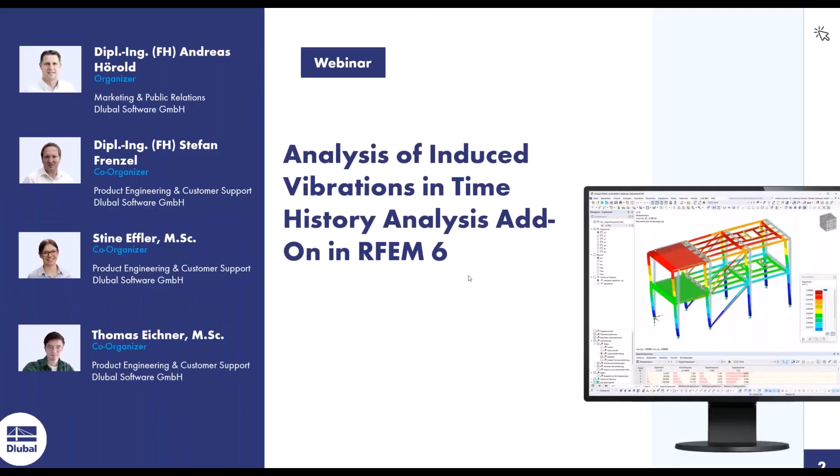So hopefully you can see my screen. Okay, we go directly to content. As we said in the introduction, we want to have a look today at the new time history analysis add-on. I want to show you the features of the new add-on time history analysis in RFEM 6. So today I want to give you an overview of the dynamic analysis add-ons which we have now in RFEM 6 or in RSTAB 9.

Then in the next step, we want to do a natural frequency analysis of a structure using the modal analysis add-on. This is part of the dynamic add-ons we have in the program. We want to do it for a building like this which you see on the screen. It's made out of concrete and steel.

The next step of our example is that we want to perform a time history analysis with a machine-induced vibration, and therefore we use the time history analysis add-on to separate the loads, horizontal and vertical loads, and to give them a timestamp to get a result. When we are done with this, I want to show you how to optimize the structure in the case of resonance of the structure.

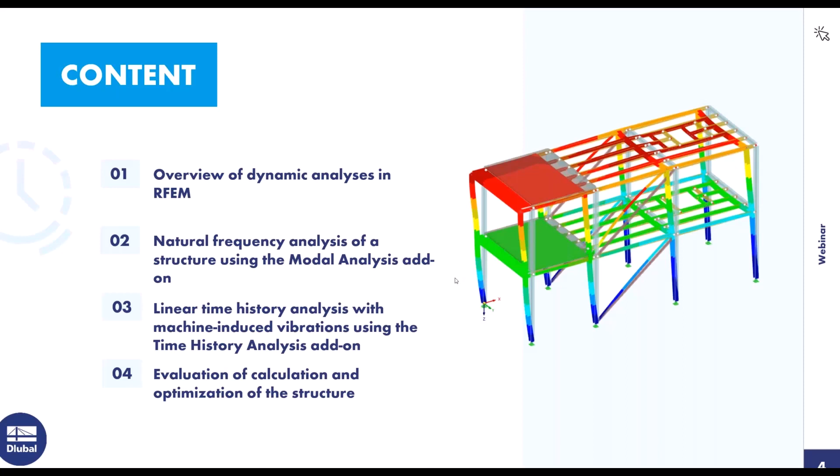Okay, then I'll go to the next one, and here you see the add-on modules we have in RFEM 6 and RSTAB 9. The first one here on the left side is the modal analysis. This is a basic tool in RFEM 6 to calculate the eigenvalues of the structure. You get the equivalent load factor, you get the eigenfrequencies of the structure, which is a really important tool to use the other dynamic analysis tools. You need the modal analysis.

The next one we released was the response spectrum analysis add-on. With this add-on, it is possible to do a response spectrum analysis, in case of earthquakes, for example. It's a linear calculation in this case.

Here you can, of course, choose a response spectrum according to a design code, for example, the Eurocode or the US code or some other codes, what you want to use. You can also create your own response spectra, maybe also out of accelerograms if you want to do this, and then the program will calculate for each FE mesh point internally an equivalent earthquake load, and then you will get at the end, of course, the internal forces for the directions and also the combined reactions of the whole structure.

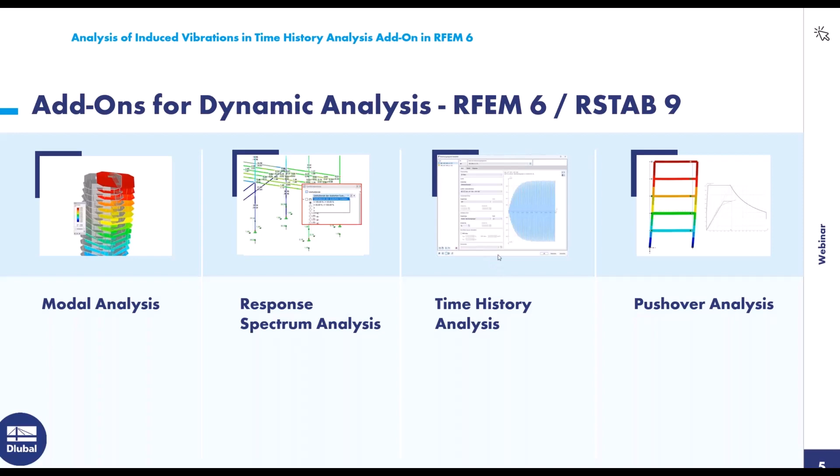And last but not least, the add-on module is the time history analysis add-on. In this add-on, you are able now to combine time with loads and to get a result then out of that. And this one we want to do today, and therefore I created a small example. This is here our practical example.

It's a machine-induced vibration. So just as an introduction here, that's a normal steel frame structure with the concrete surfaces here on this side. And we have here a machine which induces a vibration on the structure with a rotating unbalance of 0.2 kilonewtons and a frequency of 5.6 hertz. And then we want to see what happens to the structure when we bring this load with the frequency on the structure.

Therefore, I want to switch to RFEM 6 now. And here in RFEM 6, of course, I opened the structure already. My colleague Andreas will send you, I think, a link with the structure after the webinar, where you can have a look at what we do here today.

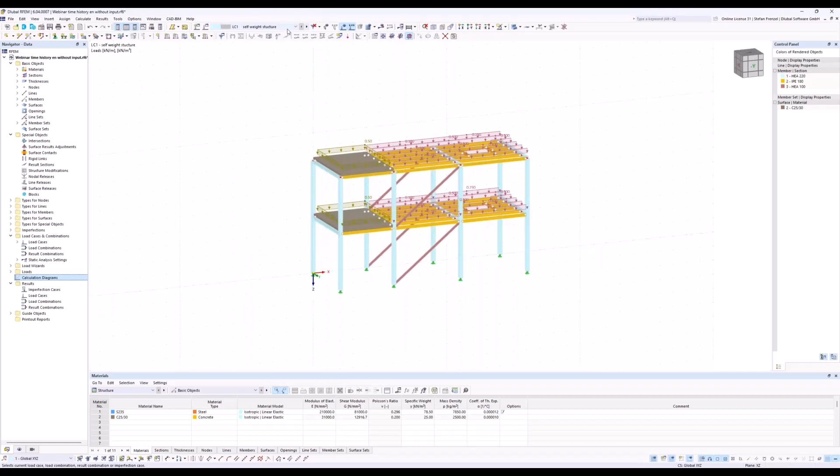Here in RFEM 6, you see at first our structure and also some loads here, the self-weight of the structure. And I created also a self-weight of the machine in this case. And I created here a horizontal induced load and a vertical induced load. That's this one and this one. I will show you later how to calculate this. But in the first step, we want to do a modal analysis for this structure.

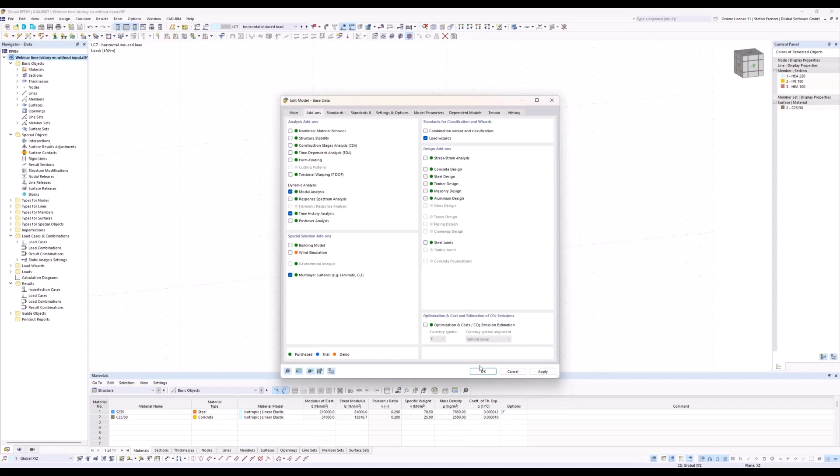And therefore, you are able here in the program to go in the base settings of your file, and in the base data, you are able to activate add-ons. In our case, we want to activate the add-on for the dynamic analysis. Here, in this case, modal analysis and the time history analysis, because we want to use them afterwards also. You see that in RFEM 6, you are able to activate different add-on modules for analysis, dynamic analysis, or for design of structures, for example, for steel or concrete. And here you're able to switch it off and on in the add-ons tab in the base data of the program. So in our case, we want to do this, and we say okay.

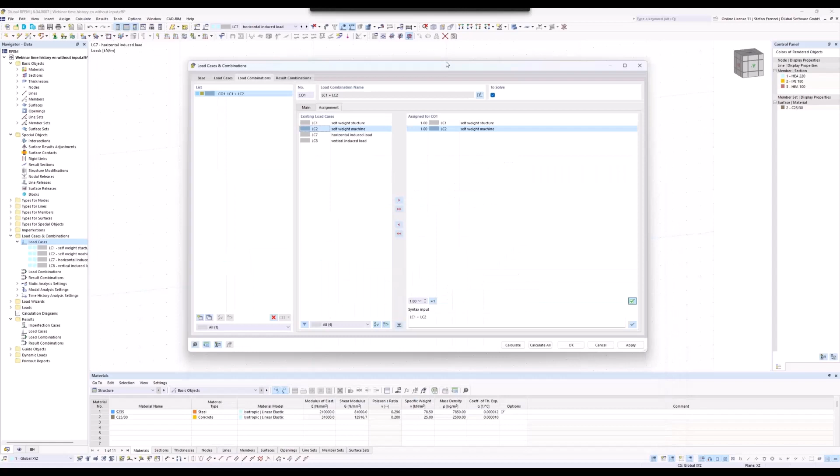And now we want to do a modal analysis for our structure. How can we do this easily? That's the first question. Therefore, I go here in the load cases and go at first on edit. You see that we have here 4 different load cases. For my modal analysis, normally I need 1 load case. That makes it a little bit different because here I have to create at first a load combination to assign these 2 load cases. Here I want to assign load case 1 and load case 2 because in this case I want just to have a look at the eigenvalues of the structure when the self-weight of the structure and the self-weight of the machine is available, and therefore I took these 2 load cases for that.

It's not necessary to choose another static analysis setting here, because for the modal analysis we just use the masses which are in the vertical direction, or Z direction. So therefore we can go back to the load cases, and here we create a new load case. It's load case number 9 now.

If you want to perform a modal analysis in the program, you just have to switch the analysis type to modal analysis. If you switch this to modal analysis, you will have a new option, which are the modal analysis settings. And of course, the program wants to know which self-weight or which load should be used for the modal analysis. So if you have a load case with loads in it, then the program will automatically convert the loads into masses. But it's also possible to create masses in the load cases, and then you can use these masses.

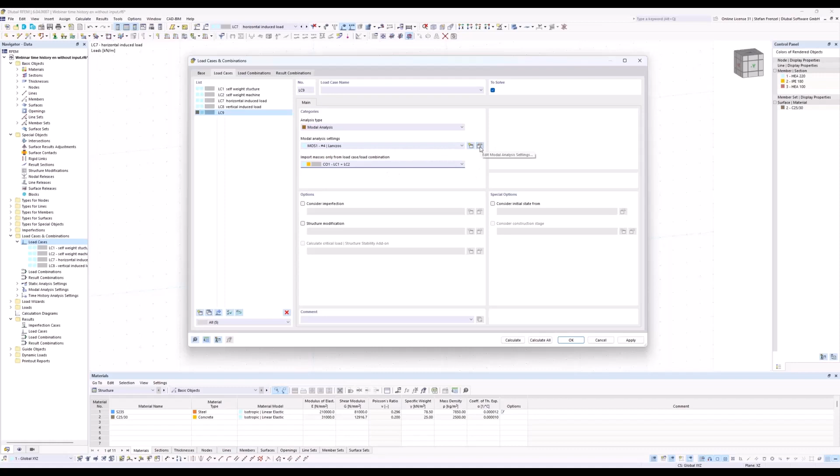In our case, we want to use load combination number 1, which is made out of load case 1 and load case 2 together. And these masses we want to use now for the modal analysis. Here I just have to go into the modal analysis settings, because for this modal analysis I need a number of modes. It's not 4, it's 30. So I need 30 eigenmodes for the calculation. I know this because I did it before, of course.

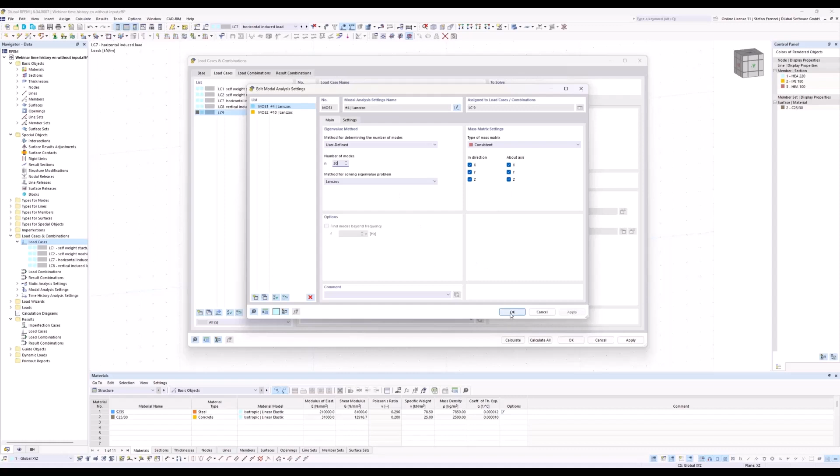Otherwise, you have to choose your own value, or you have to prove it, of course. So the mass matrix should be consistent. That means the masses are distributed on the members via a function. That's normally the best way, because it's the best way to consider the masses exactly on the structure. Then we can click OK, and we can do a calculation.

Now you see the program will mesh the structure first, and then the program will calculate load case number 9. So it's not necessary to calculate load cases 1, 2, or the load combination, because we just took the masses from these load cases or load combinations. Our first natural frequency you can find in the result navigator. Here, of course, you can switch to the eigenvalues.

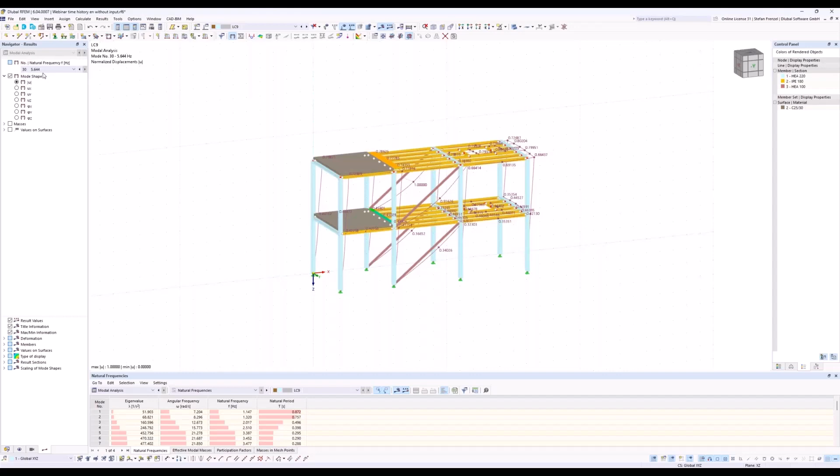But here's a really good eigenvalue. It's also 5.6 hertz. It's like our induced vibration, and you can see the structure will move in the x direction globally. That's normally not so good when you get this. Because in this case, I will switch back to the presentation.

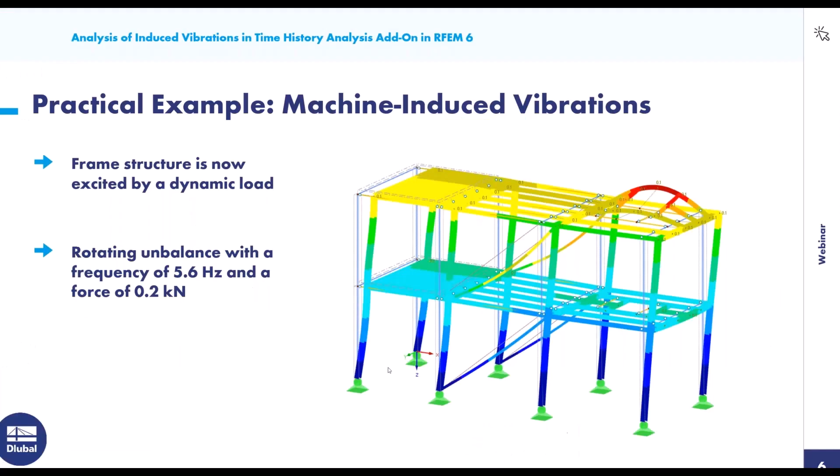In this case, we have to define now the input values for the time history analysis. And I told you that we want to use 0.2 kilonewtons as rotational mass, or as unbalanced mass of the machine. And I have to calculate these 0.2 kilonewtons to the member length, and then we get 0.025 kilonewtons per meter. And this I bring onto the structure in load cases number 7 and 8. You see here the 0.025, and here also I just divided it by the member length where the machine stands on, and then I calculate this value.

So if I go back to the input values, I have to define now two diagrams, one for the horizontal and one for the vertical. And between the horizontal and the vertical, the difference is just a shift of pi/2. That's all. In this case, by the rotation of the mass, I have a vertical maximum load and a horizontal maximum load, and it's described by a circle. So that means I have to use a sine function for that.

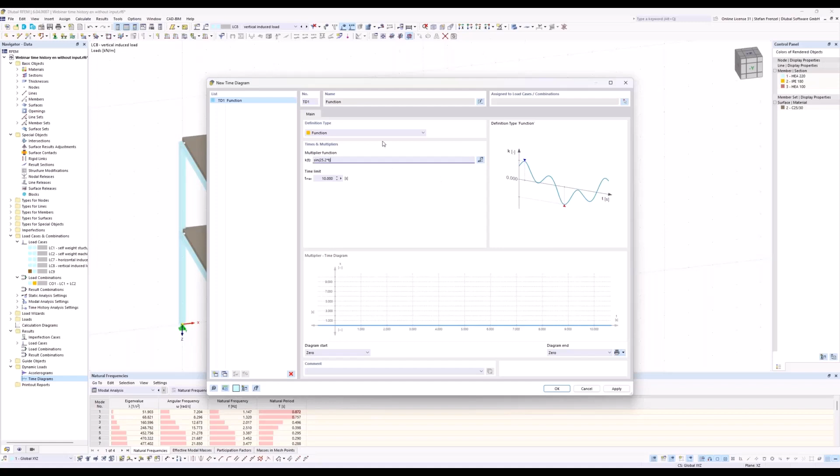The other option is to use a function. In our case, we want to use the function because it's a really easy function. It's just the sine of 35.2 multiplied with the time. That's all. And then you should get the result for it. So we want a sine function. In this case, I just want to call it horizontal part.

Sorry, there's an R. Like this. And I copy the whole function again, and here I just add the value 1.5708 to get the switch. And I change the name to vertical part. So these two functions describe the induced vibration of my structure.

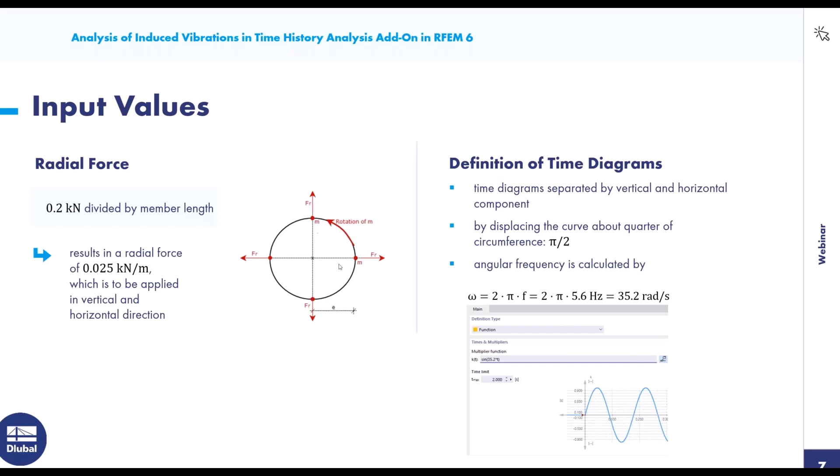Nothing else. And here you see the switch between them. Here we start with a maximum, and in this one we start with 0. That's the same as on my circle: when I have a maximum force in one direction, the force in the other direction is 0. If I rotate 90 degrees, the other one is maximum and the first one is 0. Therefore, I use the function to get the same behavior, like in my presentation.

Sorry for the interruption. In the PowerPoint, you used 35 rad, and in the... Oh yeah, that's correct. 35, yeah. That was my fault, just a typing error from my side. I have it also on my letter here, 35.2. Okay, thank you for the interruption. Then we can go on. I changed to the value 35.2.

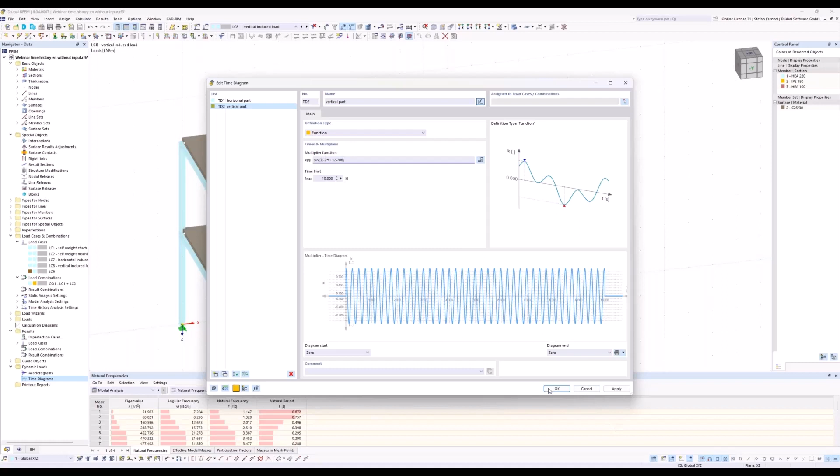The next step is to show you that we have an angular frequency of 35.4, which is near to 35.2. That means I could get a resonance for the whole calculation, because of the horizontal part, my horizontal load. If I look at this eigenvalue, I just go to load case number 9, and I see a deflection which is also in the x direction. So you have to be careful, there could be a resonance in the structure.

So with this knowledge, we go now to the time history analysis to show, hopefully, that there's a resonance in the structure. Therefore, we create a new load combination, and in it we can change the analysis type to time history analysis. That means we are able to assign load cases, and to each load case we can assign a time diagram.

That's our input: a horizontal load with a time diagram, and a vertical induced load with the vertical part of the time diagram. That's normally all, because now we can induce the machine unbalanced load to the structure over time. We just have to change some time history analysis settings: we want to use the linear model, the damping should be 0, we don't need damping at first, and a maximum time of 5 seconds is okay.

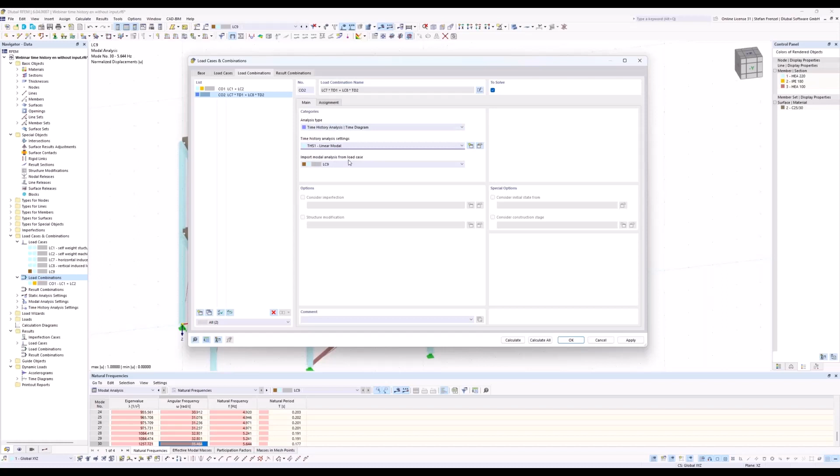And if I use, of course, the linear modal analysis for the time history analysis, then of course I have to choose here the result of a modal analysis. That means for me, I just have one load case with a modal analysis, so I can just use this one. And then we can click on OK and calculate the whole stuff.

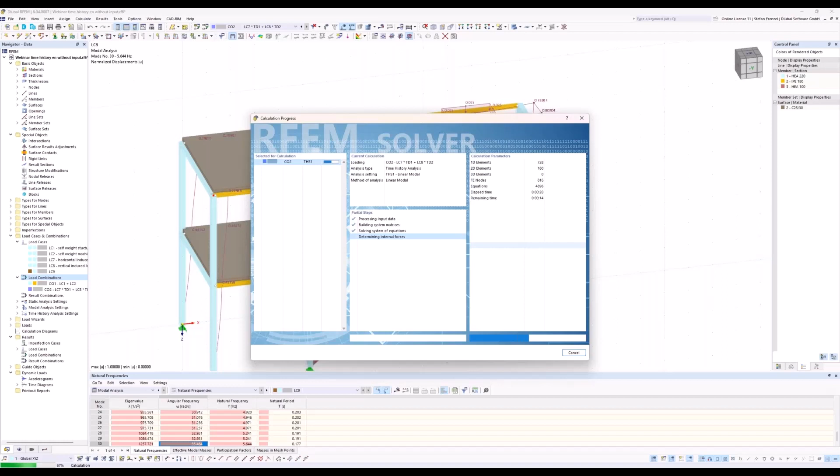The program will now perform the time history analysis over 5 seconds with a delta t of 0.01 seconds. So there will be created a lot of results, of course, but it's in this case necessary because I have 5.6 Hertz as induced vibration, and therefore I need, of course, a small time step. So, okay, 35 seconds, it was not so long.

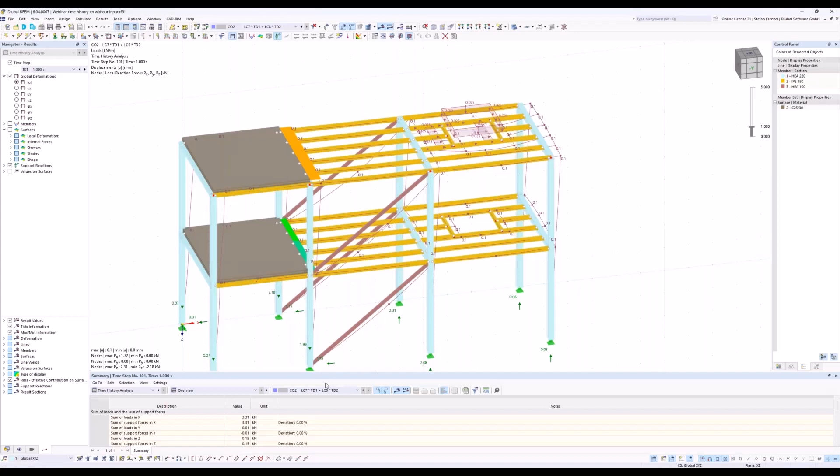Okay, so what's the result of that now? The results are also like in RFEM 5 or like in the old program. You get the results here as a summary in the global table of the structure, and maybe some of you know or used the old one, and here it was possible to create also directly a diagram. So it makes now sense to have a look on a diagram, because here I can't see anything.

So I can of course switch here through my time steps, but it makes not so much sense because I normally pick one point and I want to see this point over the time. What's happened to this point? And therefore we have here calculation diagrams, which you can find in the data navigator.

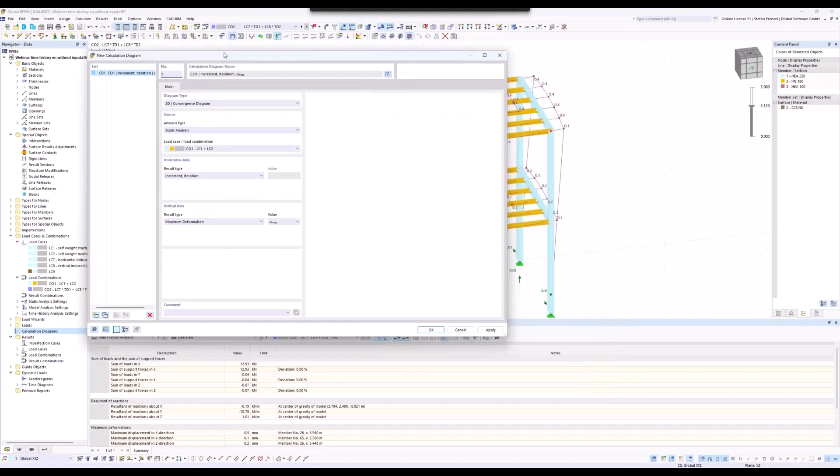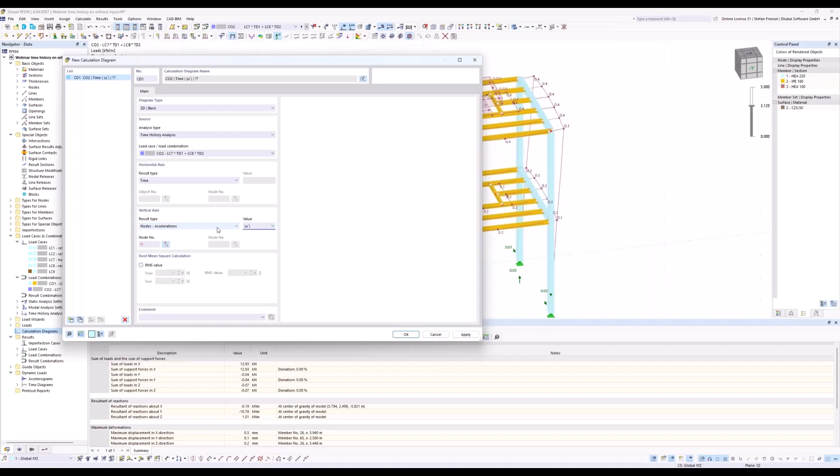If you just click here on the new calculation diagram, you will be able to say, okay, you want to have a basic diagram, 2D. We want to have a diagram from the time history analysis, load combination number 2. That's correct. And here, for example, I want to have a look on the nodal accelerations. That makes normally sense. So I take this one, okay, and I just have to click on a node. Maybe I want to have a look on this node.

That looks not so nice. Maybe we take this one. No, wait, X. X looks nice, yeah. So the X direction. The other one, this one here, it's made out of all directions. Therefore, it looks a little bit strange.

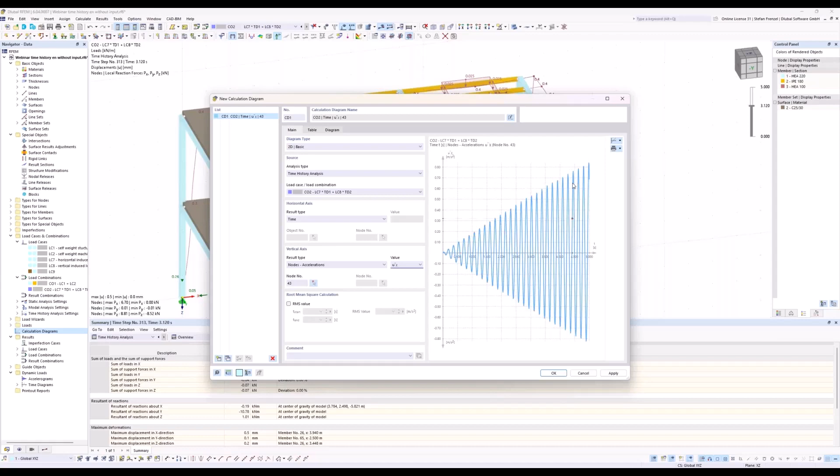But in our case, we should have a look on the acceleration in x direction, and here we can see, of course, a nice picture of a resonance calculation. That means the resonance is really high. So we will get a resonance in the structure, and maybe that's not so good because now our structure can get a failure by this.

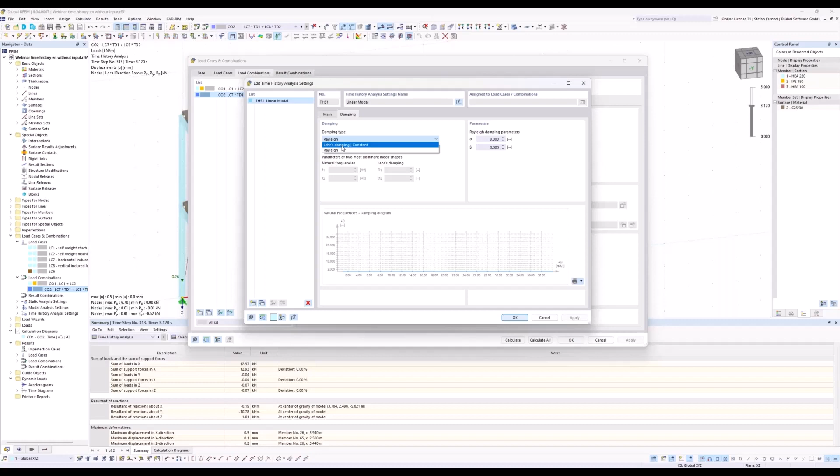What we can do now is, of course, we can go to our load combination number 2 and say, okay, normally if I do a time history analysis, there is also a damping. Here in our case, if we use the modal analysis type or the linear modal analysis for the time history analysis, we are able to use the Lehr's damping. And here I want to use damping of 0.02.

If I use here the linear implicit Newmark solver, then I'm just able to use the Rayleigh damping coefficients. Therefore, I have to calculate them at first. This is easier because you find it also in the literature. You find damping values or Lehr's damping values for structures made out of steel or concrete.

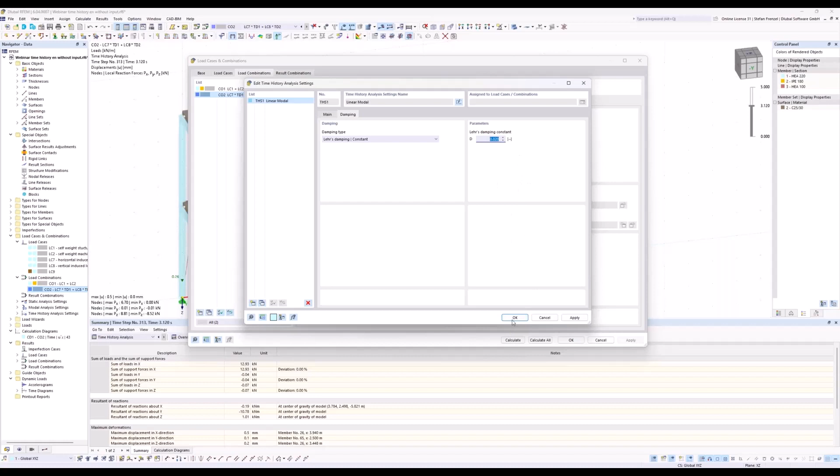In our case, we want to use 2% of that, and then we just have to recalculate the whole stuff. So that means for us, we just calculate load combination number 2 again. And then we will hopefully get, of course, here also a result.

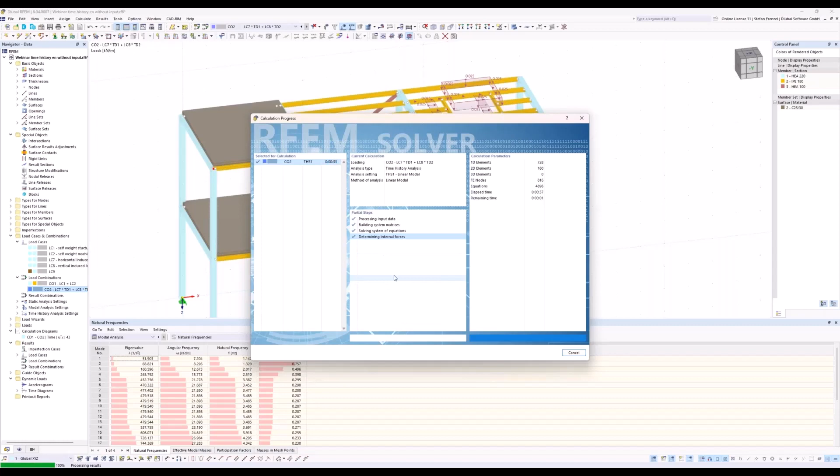So, okay, now we are nearly ready. Okay, so we see that we see nothing. So that's why we go back here in the time to the calculation diagram. And within the calculation diagram, I see now here a maximum of 0.24 meters per second squared.

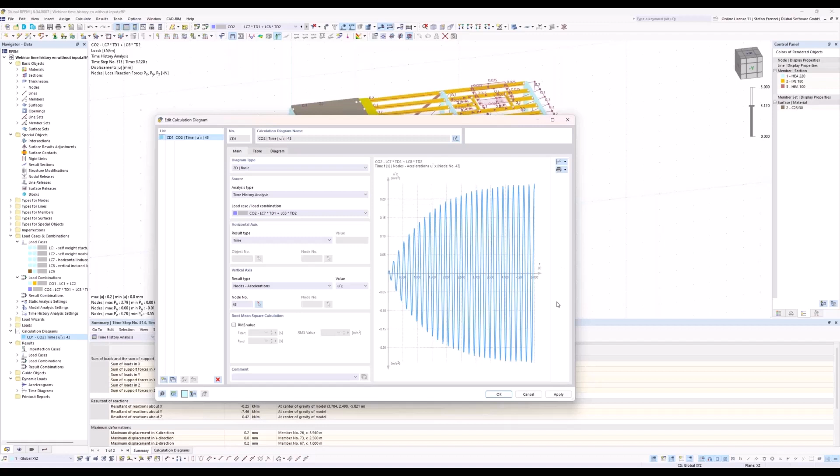That's of course a high value, and that could be, of course, also by using the damping, that it's not sufficient for using the whole building like this. So now we come to the point where we normally have to optimize the structure. One optimization could be we use another machine, because if we have another induced vibration, then maybe it could work. But normally, it's also possible to change something in the structure.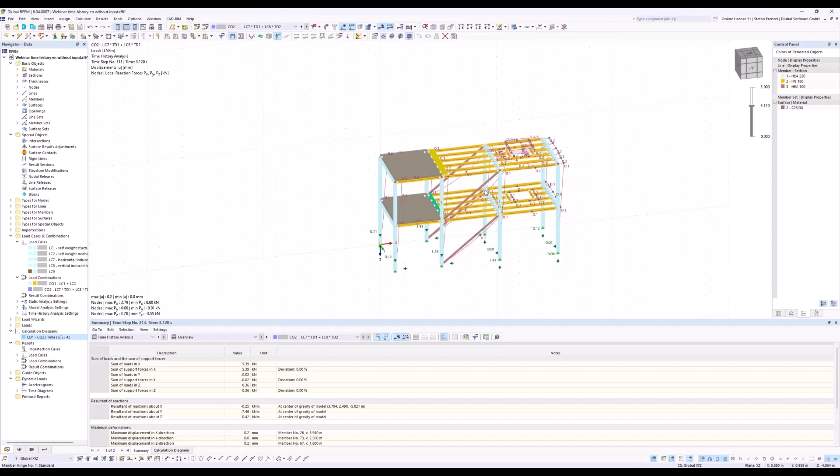Here in this structure, I want to change the bracings, because maybe I take another axial stiffness for these ones. Then of course the eigenvalues of the structure will change, and hopefully it's then possible to use the same machine, maybe with another bracing or another cross section type. But how can we perform such an analysis?

Therefore, we have to go first to the special objects. In the special objects, we are able to create a structure modification. A structure modification could be for sections. In our case, we want to change the sections, and we know that our HEA 100 is the bracing. Here we want to use, for example, double the stiffness of the area, or the double area. So that means, of course, the axial stiffness will be doubled.

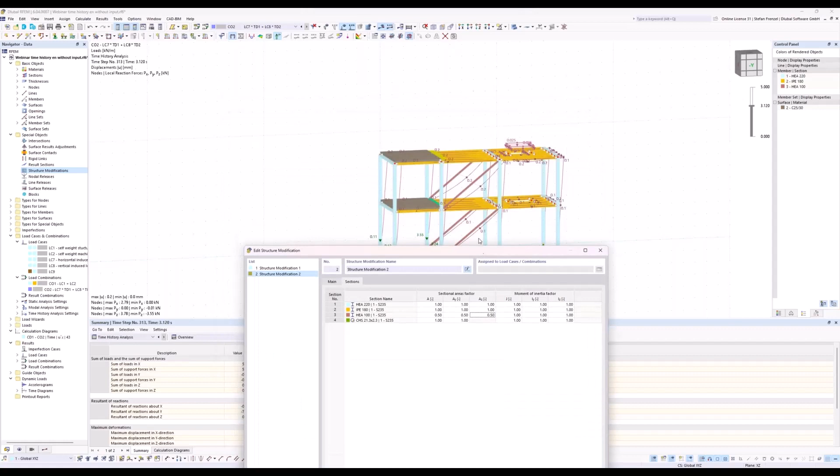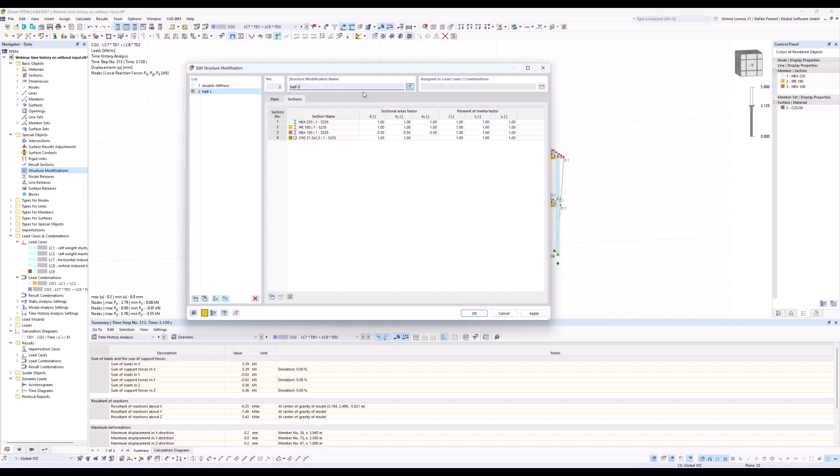And another option could also be that we copy the structure modification and say, okay, maybe we take just half of the stiffness. Could also be an option, because an HEA 100 is maybe also too big a cross section type in this case. So here we created now 2 structure modifications. I will change the name here, I will call it double stiffness, and I will call this here half stiffness. And that's all for us.

And now I want to consider this double stiffness or this half stiffness in the calculation of the time history analysis. So I just have to edit my load combinations or my load cases, because for my load cases I have to consider now also the stiffness modification. That's really easy, because I just have to copy load case number 9 to load case number 10, and here I want to have the structure modification double stiffness. Then I copy it again, and here I take the half stiffness. That's all for it.

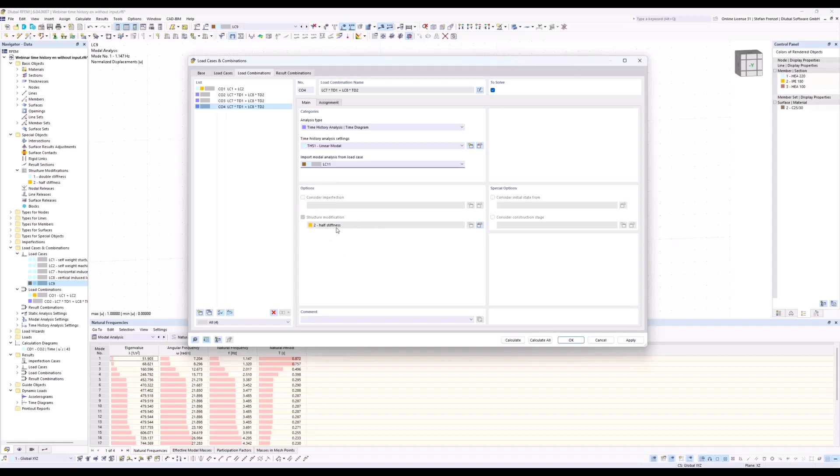For the load combinations, of course, I have to do the same. I can go to the load combination, just copy it and say, okay, here I want to have load case number 10. If I choose load case number 10, the program knows that in load case number 10 a structure modification was used, and therefore it is also used here again. If I copy this load combination again and say I want to use 11, then the program will automatically take the half stiffness, because this one was used in load case number 11. Okay, and that's all. Now I can calculate.

So you saw that the program will first calculate load case number 10 and 11, because they are essential for combination number 3 and number 4. It's not possible to calculate load combination number 3 and 4 alone. So the results have to be calculated first, and this was done in load case number 10 and number 11. Okay, then the program will do the calculation. I think it will not take so long.

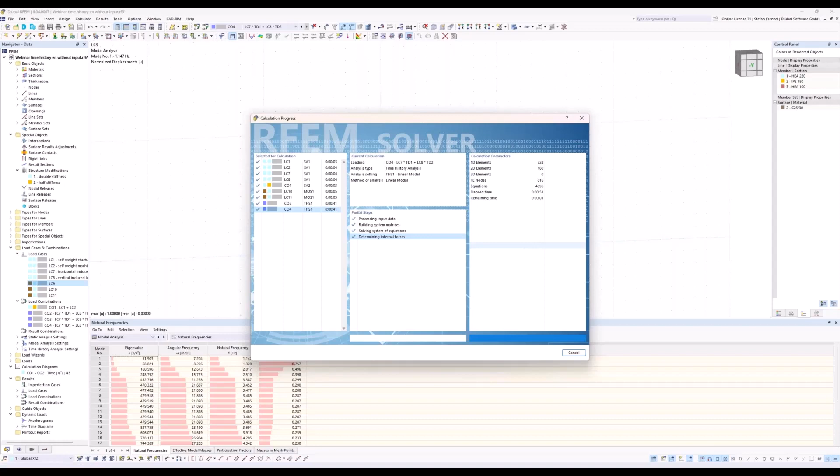Okay. And now we have the results here. So then maybe we can have a look at that first. Therefore, we can go to the result diagrams and edit them, of course.

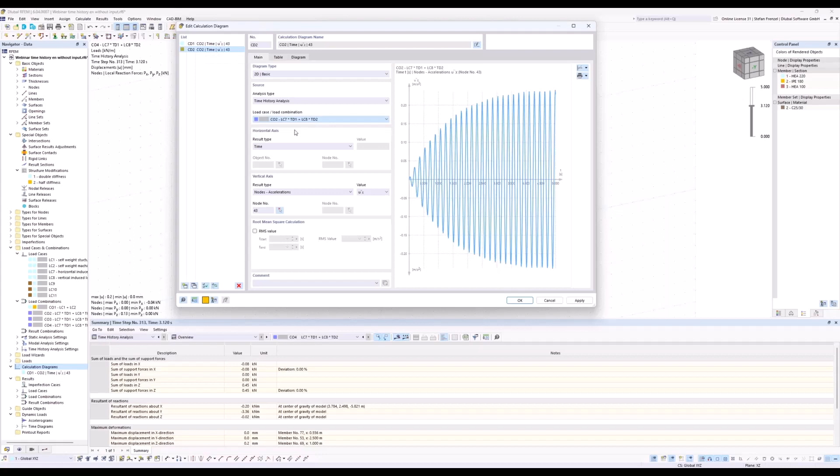So we see that at first we had a look at load combination number 2 for the acceleration in x direction at node 43, and here we get, of course, a high acceleration, caused by the resonance of the structure. Then I will just copy this calculation diagram, and here I will just choose combination number 3.

And you see that here at the beginning, of course, it's the beginning of the induced vibration, and after this beginning, the structure will normally vibrate with constant values. But you see that the accelerations are really small. They are so small, it's not possible to have a look at them directly. So it's normally nothing.

So this is the result when I do it with the double stiffness of the bracings. If I use the half stiffness of the bracings, then the result looks like this. So that means if I use smaller cross sections for the bracings, I get an acceleration in this case which is also really small, 0.03, instead of 0.2 meters per second squared.

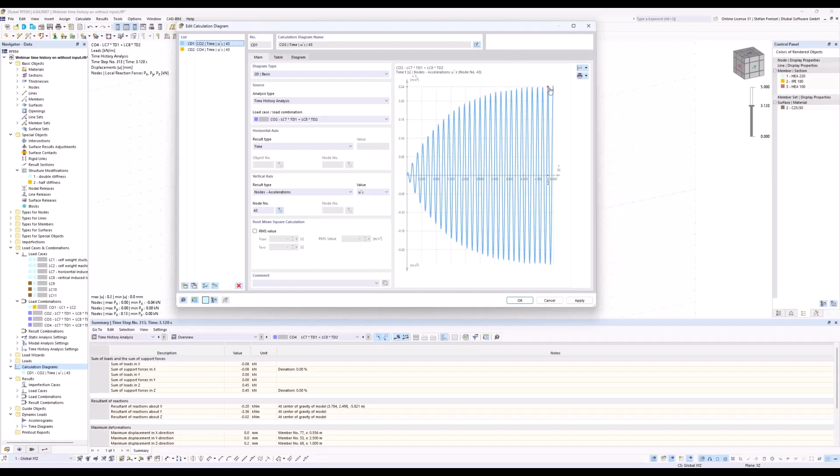And therefore, you can also choose maybe a smaller cross section or a bigger cross section. That depends on you and maybe also on the stress level of the structure. But normally these bracings could be really small, because you just have normal forces in these bracings, because they are hinged at the start and at the end, and therefore it is normally not necessary to use big cross sections.

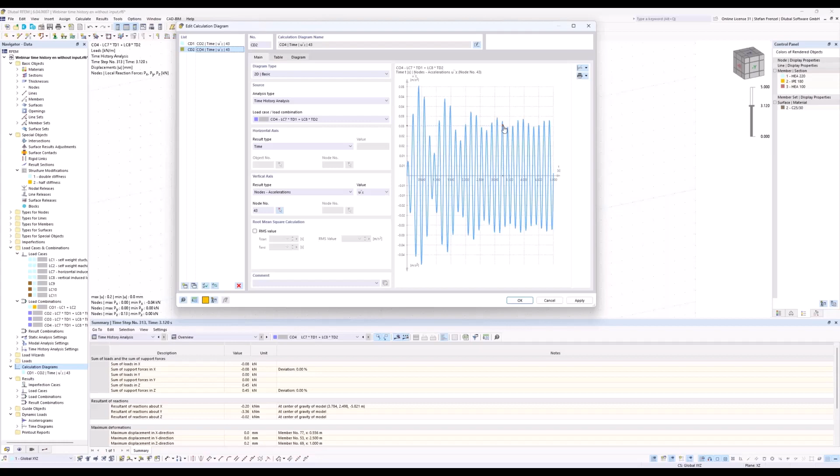So in this case, just by changing the bracings, you will be able to work with this machine on this structure, because the induced vibration of this machine is then no longer critical for the structure. But it's always good to have a look at such things, because nobody could notice that we get a resonance case like here for such a machine when I put it on the structure.

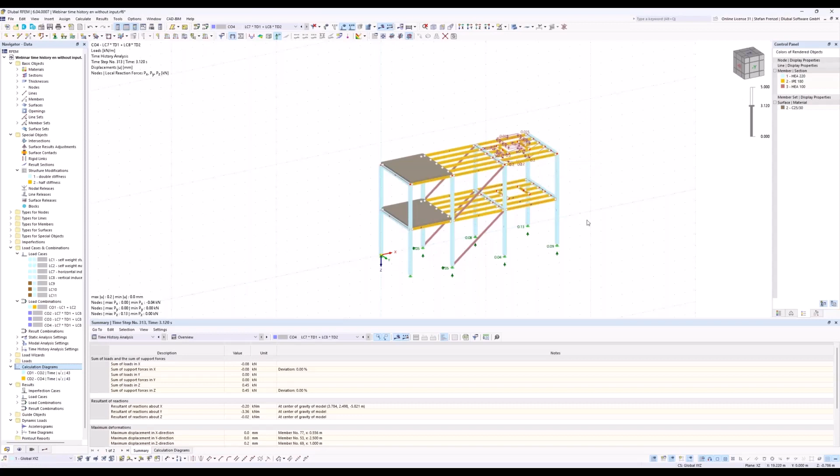And therefore, you can design such a structure just by choosing other cross-section types or using the structure modification to get a result for the structure which is usable at the end. Okay.

Andreas. Are you there? Sorry, I had to unmute myself. Thank you for the presentation. I hope it's clear now.